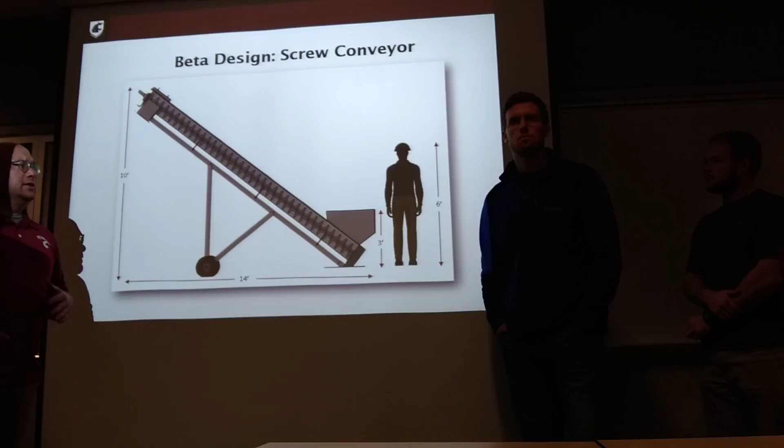Our main problem is how are we going to transport the clay into the mixing. So we came up with an alternative from buying a backhoe. This solution is obviously going to be cheaper. There's a few things that go along with this in our design ideas, because we didn't want to move any earth, we didn't want to have to make any additional foundation or any structures.

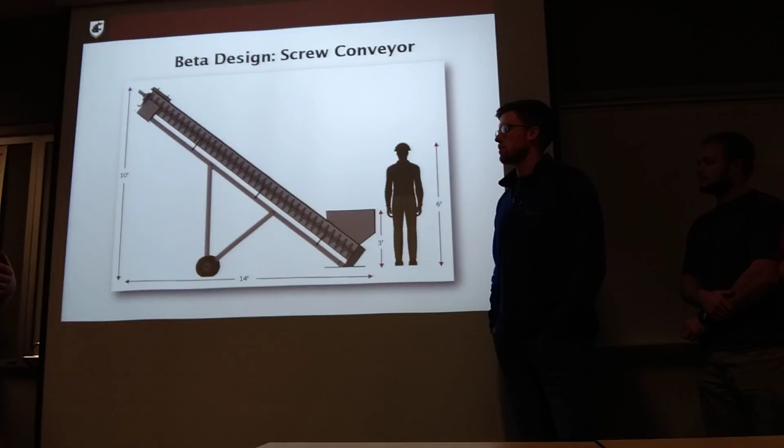So this solution of having a conveyor was the best idea. We decided between either a belt or an auger or a screw conveyor. We decided to go with the screw conveyor for a couple of reasons: one, there's less moving parts; two, we have a member that has firsthand experience using a grain auger. Also with this design, it's going to be easier to manufacture, put together, have replacement parts ordered or made in-house, and it's transportable.

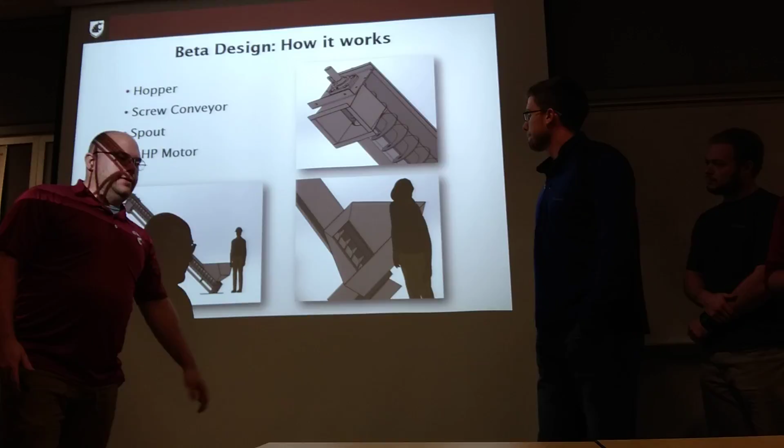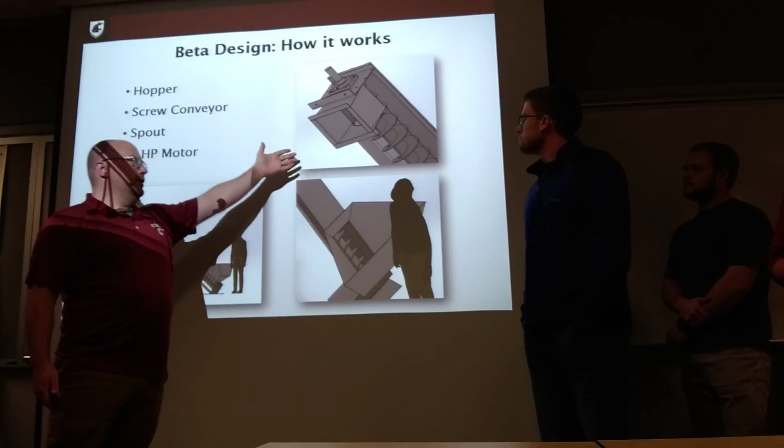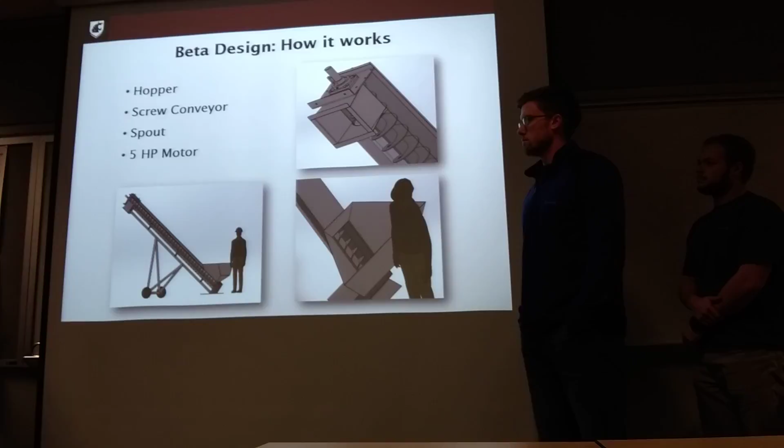So how does it work? Auger conveyors are one of the oldest ways of moving bulk material, and it starts in the hopper here, which is fed by using manual labor. Once the clay goes into the hopper, it drops down into the auger, and then it moves up to the spout here. The auger is powered by a 5 horsepower motor, positioned at the top. That position was chosen because all the benchmarks we looked at all had the motor at the top. So once the clay reaches the top, it then drops into the mixer.

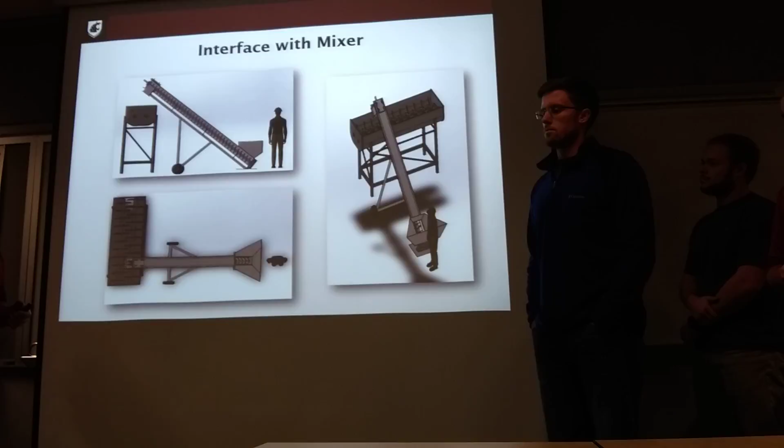This is the interface with the mixer. So one of our design variables, obviously, is how high is the mixer, so we put that into consideration. Also the length of the auger is another variable, because we didn't want to exceed 45 degrees. The more of an incline, the harder your motor is going to work and the less efficient your design is.

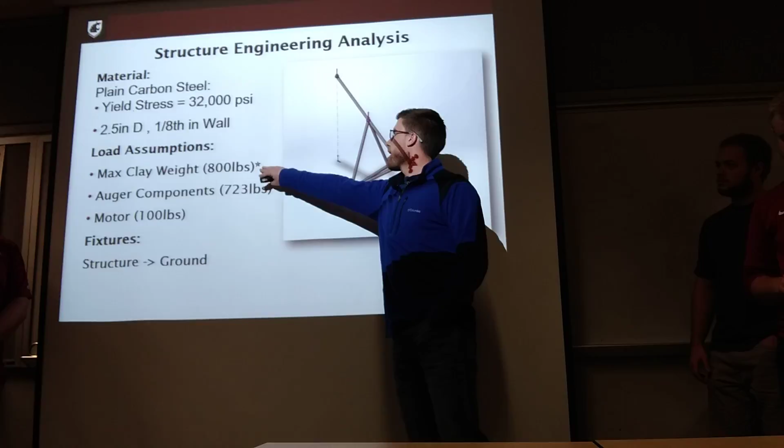Just looking at our auger frame, we took away the components, and we needed to figure out our diameter for these tubes that would support our assumed loads here. For the clay weight, we went with 800 pounds, which is the volume of our auger completely filled. Then for the components themselves that will be mounted to this backbone piece, it was 723 pounds. And of course our engine weight was 100 pounds.

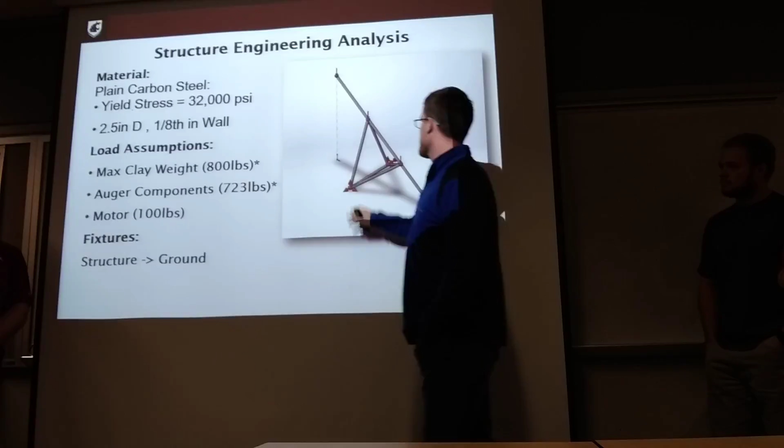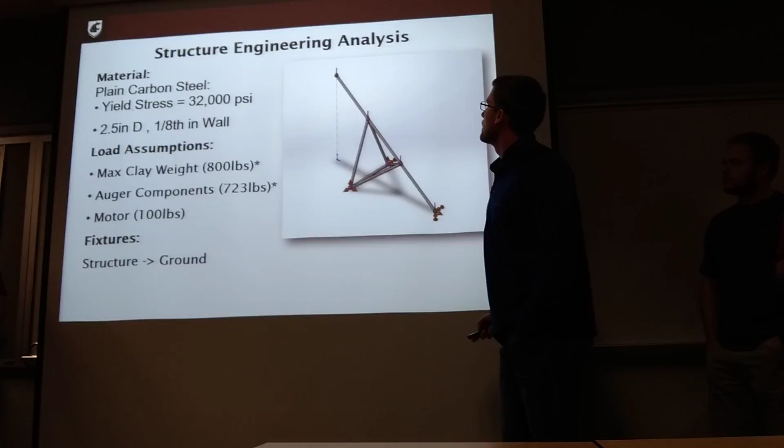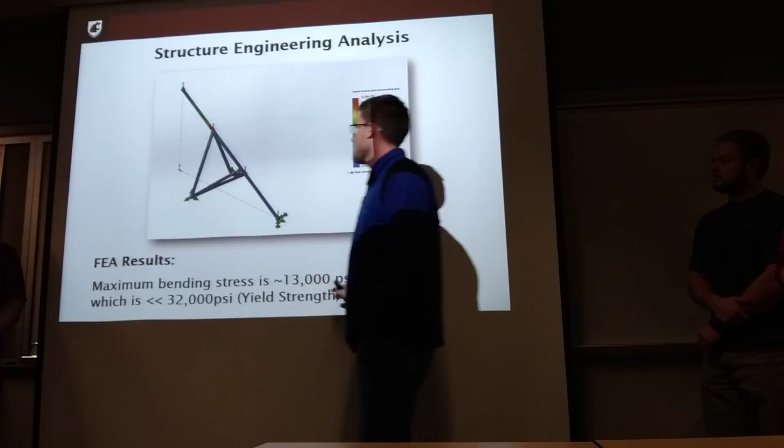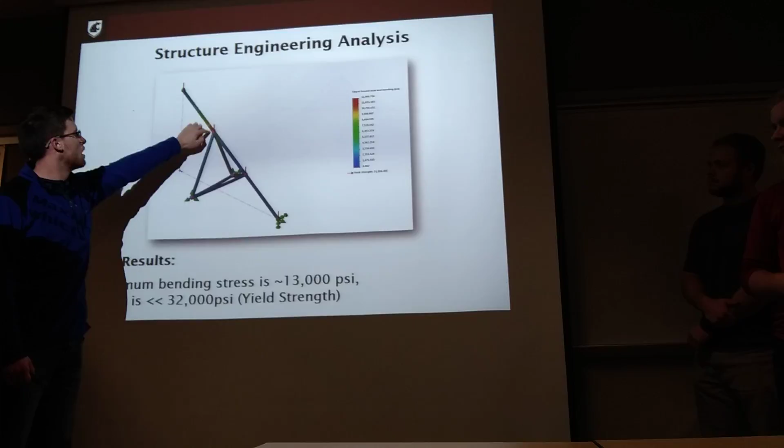So we fixed these positions to the ground and then used a SolidWorks FEA study to see what would happen. From the results, we got a bending stress of 13,000 psi, which is significantly lower than the yield strength of just a basic 1060 carbon steel. So we passed with a 2.5 inch diameter tube, but there could be two ways of making this design better: putting a support from here up to here and then from here to here would get rid of this cantilevered position here. That could help.

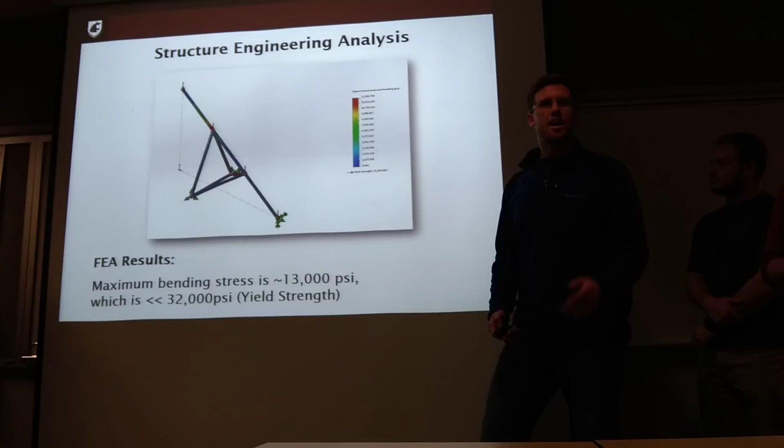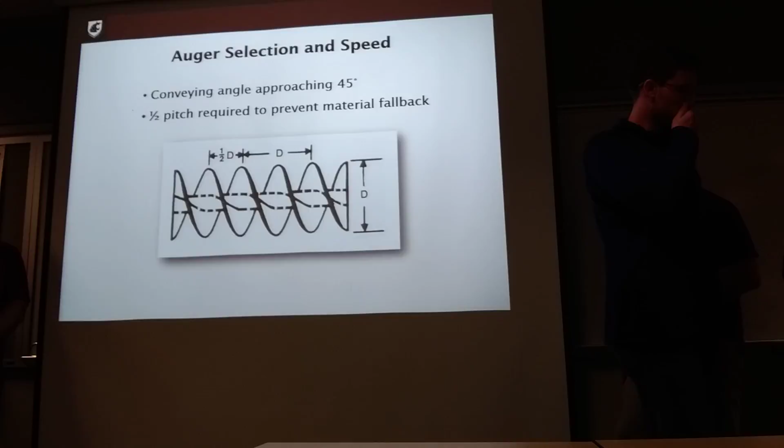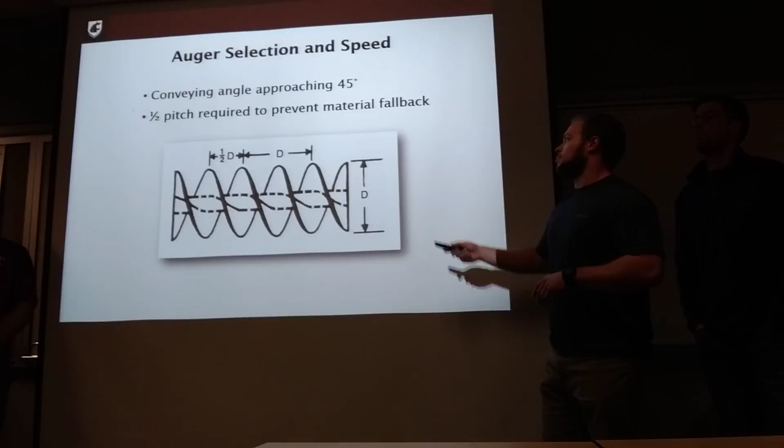And also a higher grade alloy would make this significantly stronger than the low grade 1060. To determine our motor choice, we need to know the type of auger and the auger RPM. For the type of auger, since we're operating at an incline, you want to have a reduced pitch for the flighting. So typically for an inclined auger, you're using 1/2 to 1/3 pitch to prevent any material fallback.

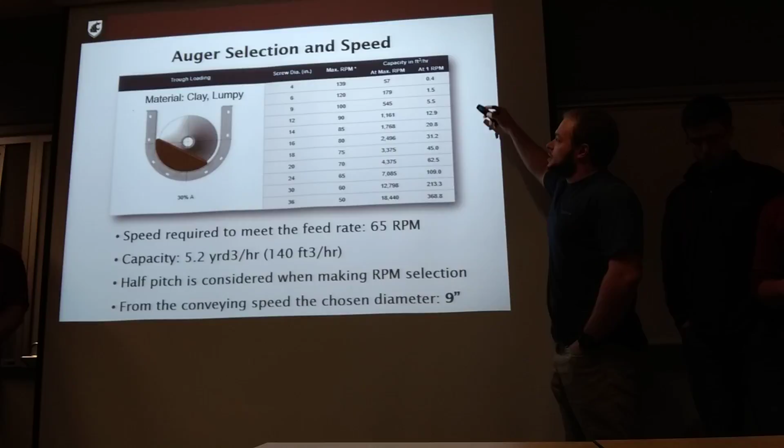And the half pitch is considered when making that RPM selection. So from this table, we decided that a 9-inch diameter auger would be sufficient for the feed rate required.

And of course, since we're operating at an incline, we're going to have an efficiency factor. So at about 45 degrees, you have a factor of 2 for your incline factor, and that's taken into account in the total shaft horsepower for an auger at an inclination.

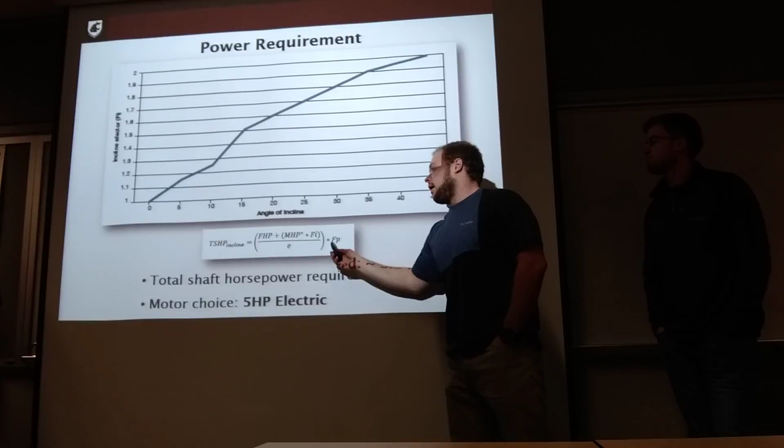So these are just a couple of factors. This is frictional horsepower, how much horsepower is required to run it dry, and then how much is required to run it with the material in it. Then there's your inclination factor, motor efficiency factor, and another little factor for the pitch. So total shaft horsepower required was about 3.5, so a 5 horsepower motor would be sufficient.

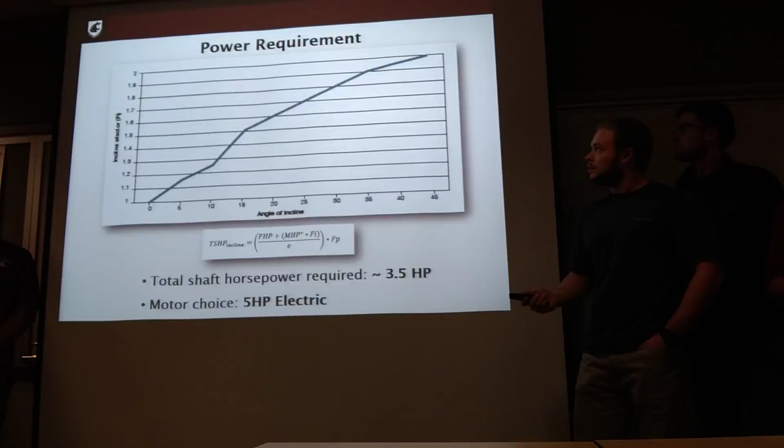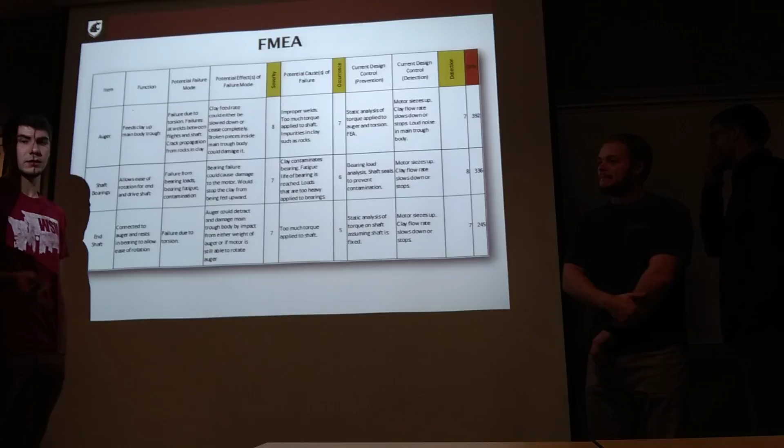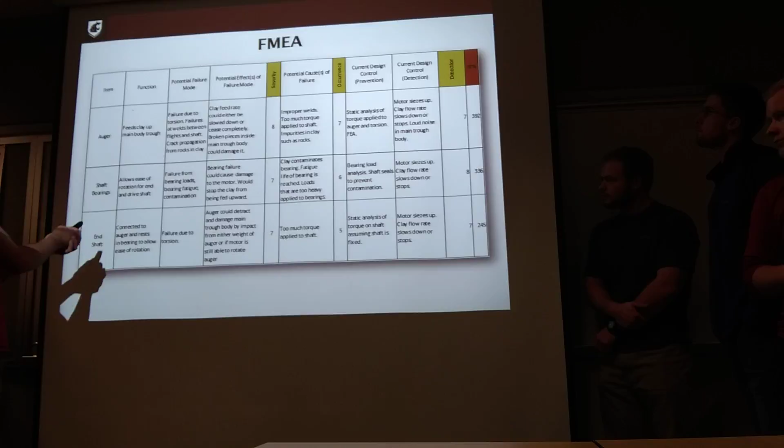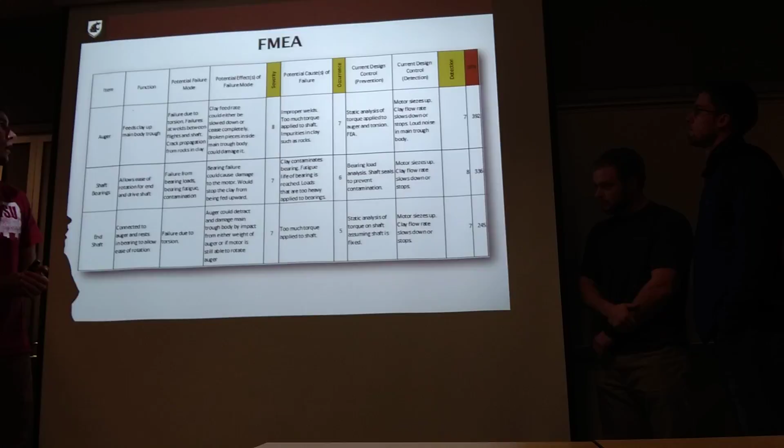Okay, so we divided the entire conveyor system into individual components and did a failure mode and effects analysis, FMEA, on each individual component to determine which would be most likely to break or fail. Here's an example of how we went about this: the components, the function of each one, how it could fail, how that failure would affect the rest of it, and we assigned numbers based on how bad the break would be for the entire design, how often it would happen, and how detectable it is.

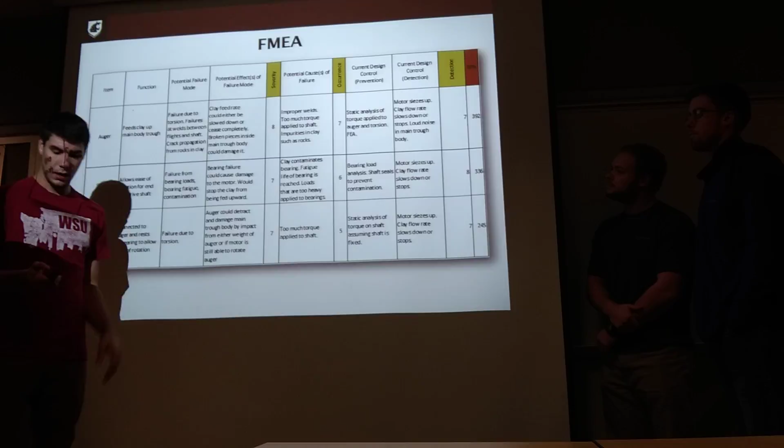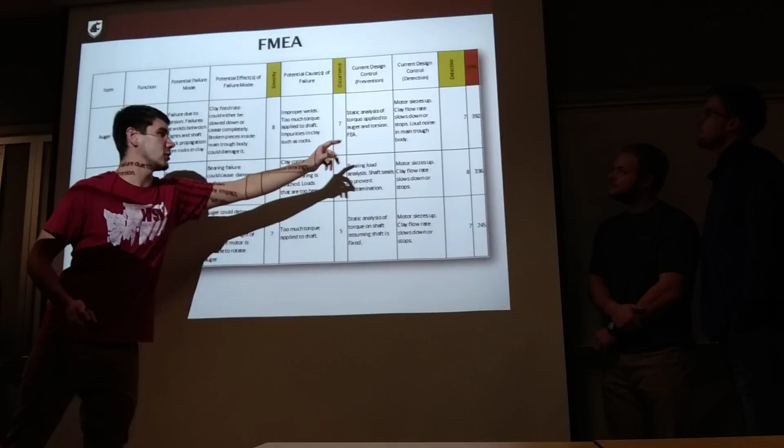So right here I have listed the top 3 components that could fail based on multiplying each of these factors together to get an overall risk priority number.

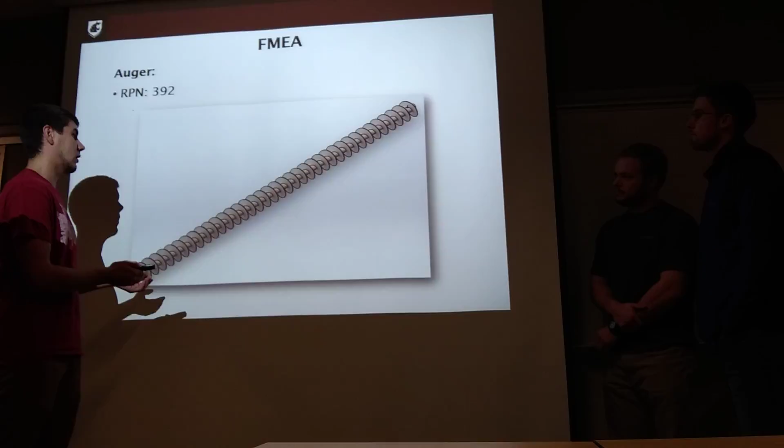The top one was the auger, which wasn't a surprise since without the auger, you cannot move the clay up. So if this fails, that would be a big issue. I know you wanted to have somebody on site to weld and fix augers, so that would definitely be something good to have for both this conveyor system and the main auger in the clay machine. The next two were our end shaft and the shaft bearing.

If the shaft bearing fails, the whole auger conveyor won't work anymore, the auger won't be able to rotate. But luckily these aren't too terribly difficult to replace.

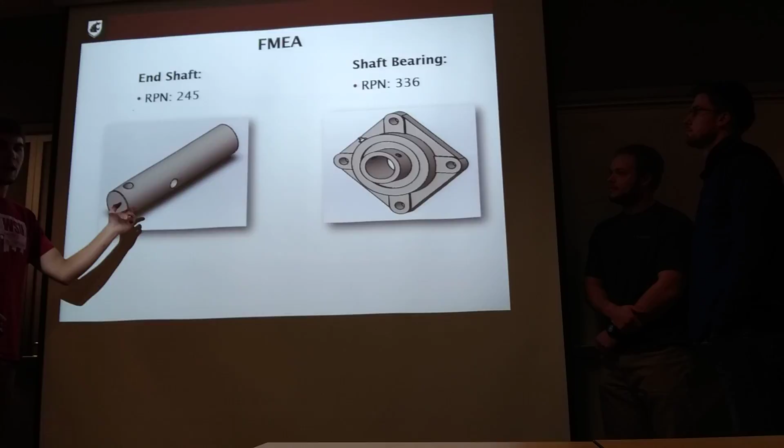And then this is the end shaft, located at the bottom of the auger conveyor system. The reason it ended up with such a high risk priority number is that you cannot detect if it's going to fail or not. And if it breaks, same concept as the bearing, the overall auger will no longer be able to rotate, and you would have to replace this part as well.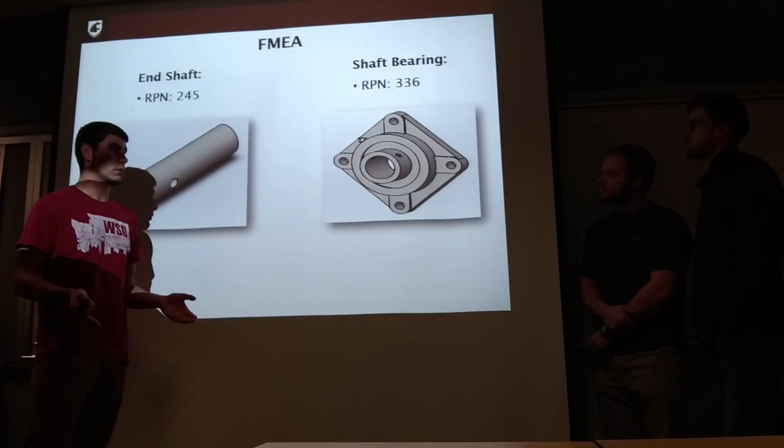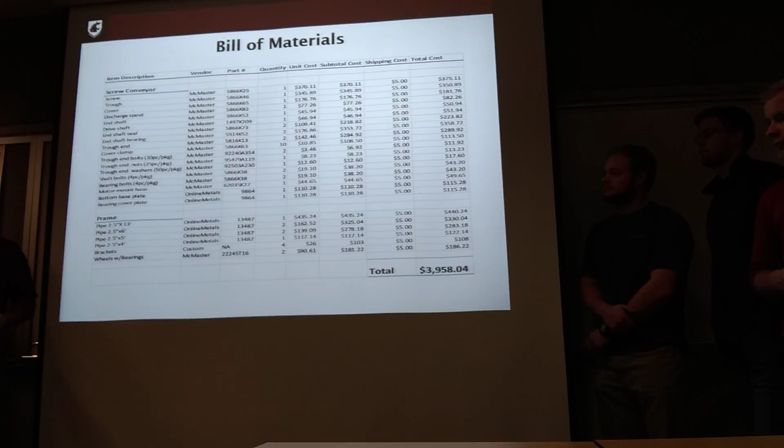Is your auger going to be one piece? Yes. How long is it? The main auger is 14 feet. And that's based on, that is a variable, so if the mixer is lower than the auger, we can always change it, but the intention is to make it one piece.